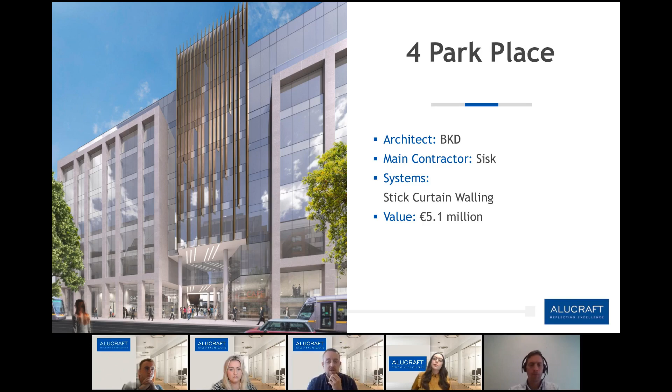4 Park Place, this one has a particular unique fin system on the exterior, so you can see not a lot of this is standard - it's very customized, hence the design and engineering work we have to do. And 19 to 22 Kildare Street, again you see more examples of the metal cladding and different glazing systems.

Same with Grand Parade here, all based in the Dublin area - very exciting projects with some really great clients. Heinz is a multinational client and a big presence here in the Dublin market as well. For South County, we're actually wrapping this up in construction, but again you can see the different glazing and metal panel systems on here.

So what does an Alucraft designer do? Luke can certainly touch on this later on in the graduate program, but basically we're taking the design intent from the architect, from the design team, and these next few slides will show you what we receive and then what we work on here within Alucraft. For example, here you can see for this particular project, 5 Harcourt Road, on the left you have the typical detail from the architect, the design intent, and on the right is our finished detail after it goes through the various different stages of construction - status C, B, A.

This goes through our design office, through our production office, the engineering, and this is the final result. You can see there's a very big difference in the technical drawing from the left, from the architect's detail, to the Alucraft specialty subcontractor detail on the right.

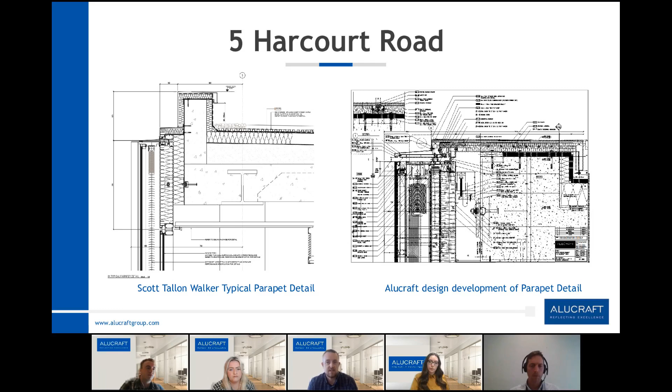This goes through various different status reviews with the entire design team before being approved by the architect and design team prior to starting construction.

Some other examples: the typical floor slab detail, and then the final engineered detail, taking into account the engineering, the thermal calculations, U value, movement, everything else that's involved. The engineering is a critical part of this. A lot of information you don't see goes into this detail, analysis and reports as well, which we'll talk about in the actual graduate program.

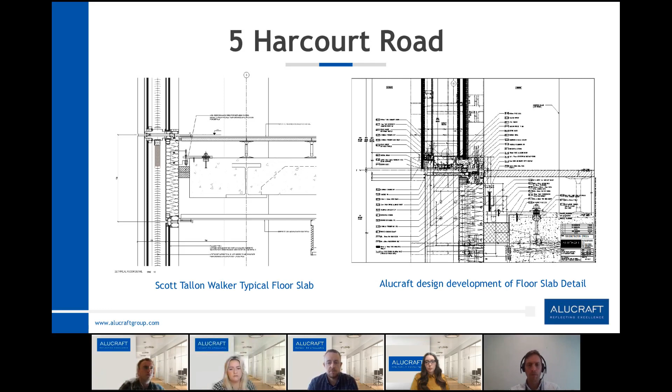You would get an opportunity to work on all aspects of production as it goes through. Here you can see a typical elevation, again the design intent, which is basically telling us the overall size of the glazing, floor to floor heights, and everything else.

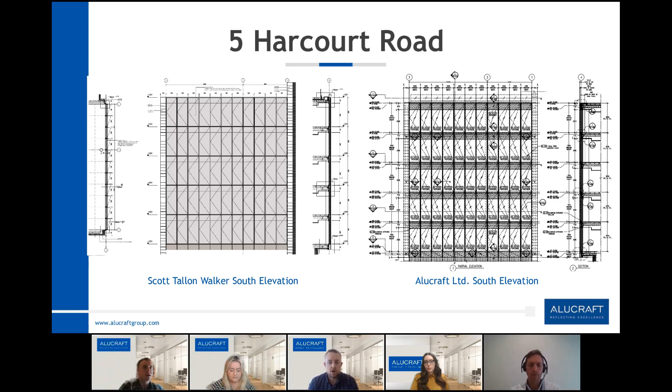From there, again we produce our detailed elevation with the different glass types and details and movement and everything else. So you can see an example of the drawings we receive from the tender stage, and how we develop our technical drawings, which are used for ordering and for construction.

As part of the engineering program or the graduate program, you'll see there's different roles and responsibilities within the design office. Design for architecture, working with architect's drawings.

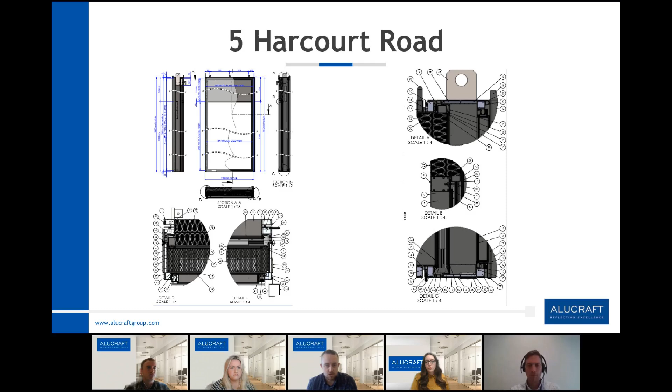Once we develop the status C, B, A drawings, it moves into production, and you start to see some of the production drawings here. We're actually getting into every single tab, every single screw, nut, bolt, insulation—all labeled and detailed and drawn here.

Just another example of some of the engineering for this stair tower. You can see the actual structural cladding that we have to put in place to support our metal panel systems, whether it's glass or metal panels or a combination of both.

But we would work on all aspects of that—something that we would work on with the design team and their structural engineer, but it's usually done in-house and sent over to them for approval and review too. So it is quite interesting and presents its challenges.

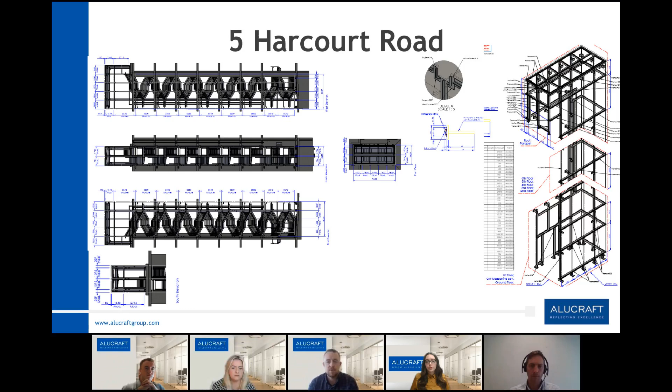This is not your standard window glazing system with metal panels. It has a lot of different bits and pieces to it, so it is challenging at times.

Just another example of getting into our actual production details, where some of these parts have to be specially engineered or custom made. They're not just standard off-the-shelf manufacturer's details, depending upon the design by the architect.

Again, all the engineering, 3D model, and everything is done in-house, as well as our production for what we can manage at any given time here in our Dublin factory.

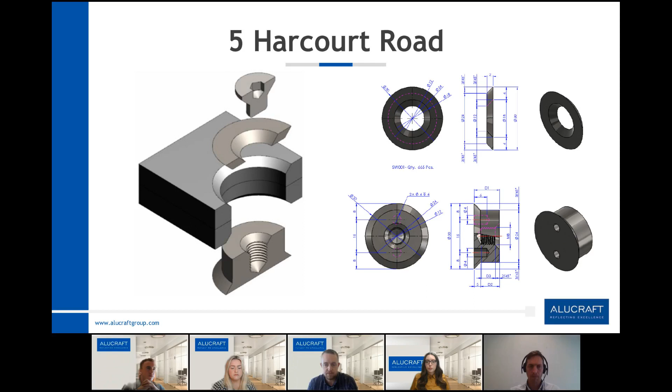So just an outline of some of the technical drawings used for design development: structural calculation, CFD analysis, TSA thermal stress analysis, acoustical reports, horizontal and vertical flanking, blind control strategies, and free airflow or automatic vents. Again, all of this is reviewed in-house.

It all goes into producing those final details and drawings and everything else. It's really amazing, the amount of information that has to be done to produce that glazing system that goes out on site to be installed.

From here, I can turn it over to Rachel and Luke for the graduate program, and they will run through the different modules and elements that Luke himself has gone through in the past. So over to you guys.

Great, thanks. So hopefully that's given you a bit of a flavour of what a designer in Alucraft does. And we have developed a graduate program that's been specifically designed to make sure that you pick up all the skills needed to be able to succeed as a designer in the company.

So our graduate program runs over a 2-year period, and it is broken down, broadly speaking, into different modules just to make sure that you cover off everything that you need.

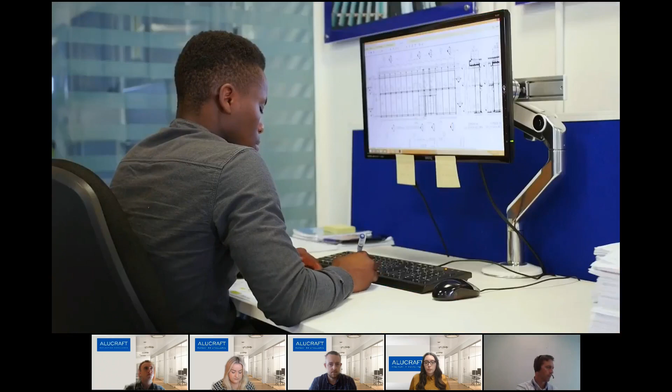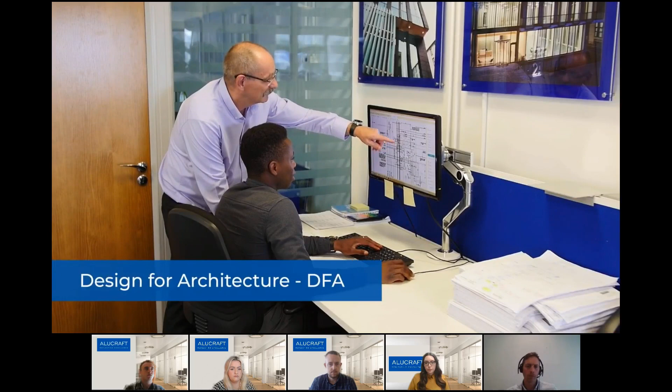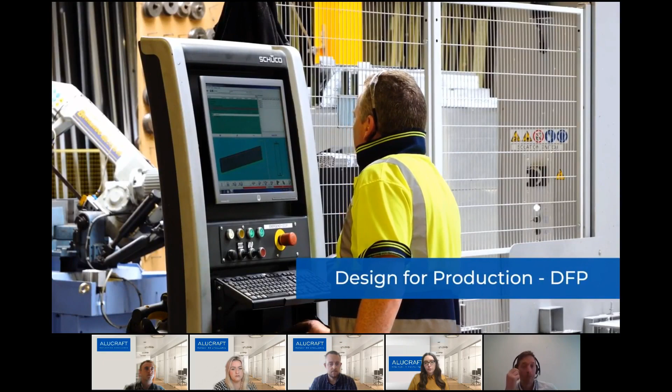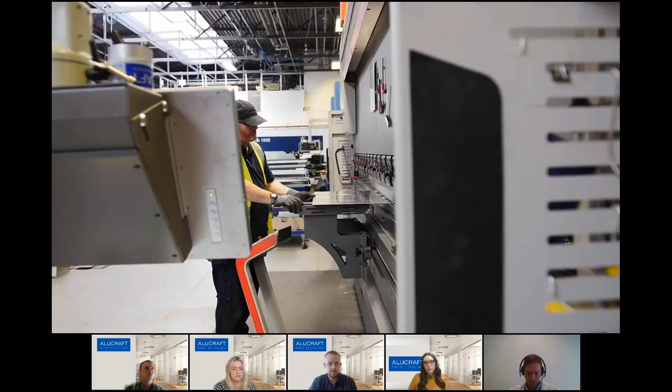My name is Jack McHugh and I am the Chief Executive of the Alucraft Group. I have worked in Alucraft and William Cox since 1991, and together with my colleagues I have managed a team of very successful people to make the Alucraft Group the leading group in Ireland and the UK in the business of facade provision. We are specialised in curtain walling, windows, and sliding doors, all for the commercial industry, mainly offices and retail. Graduates fit into the company in many different ways - we have many different departments under design, including DFA (Design for Architecture), which suits architectural students, DFP (Design for Production), which suits industrial design people using SolidWorks, and DFPP, which designs all our pressed metal. I never really realised there was such a large area for specialists like facade design until I came here and realised there's almost 100 people working here, each with their own job, all tying into one another and working well together. The hardest part initially is not fully understanding what's going on, but over time you learn more about the company, what specifically they do, and how you can contribute.

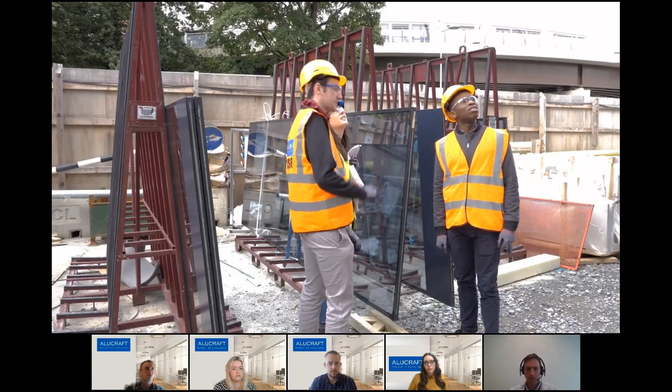Many people entering the facade industry did not come from an educated background. We believe that the industry has become much more technical and more scientific, and as a result of that we need bright, young, well-educated people to come into the industry.

The staff here are very friendly and you will learn a lot, even more than you would have learned in college. In a short amount of time you learn so much working with experts who have been using these programs and have such a deep understanding of the construction market.

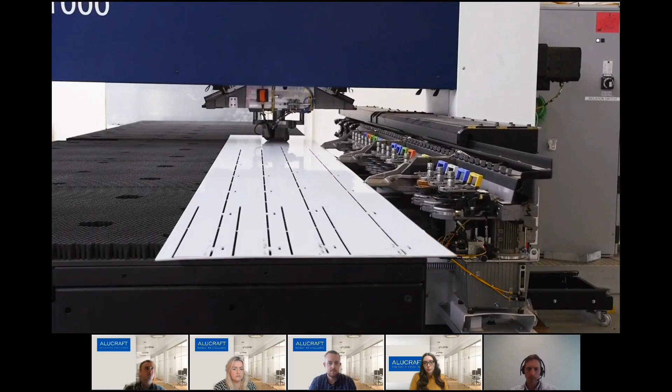You design something on AutoCAD or Revit or SolidWorks, and then it's actually made in the factory a few weeks, days, or even straight away. You can go from seeing it in 2D to 3D to actually physically holding it and saying, I drew this up on a computer a few days ago. It's amazing that it's already out now and ready to go to site.